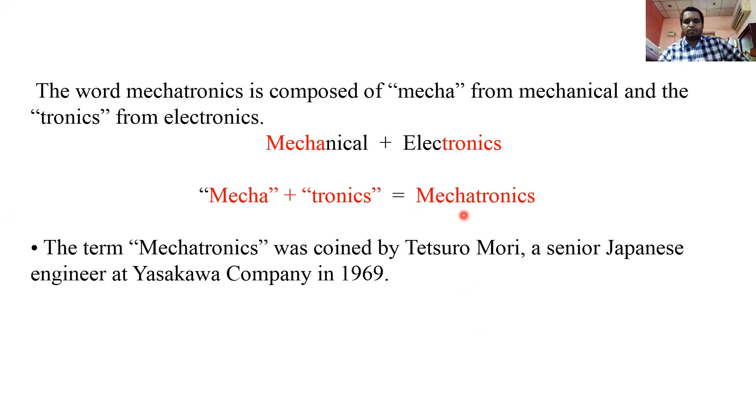The field mechatronics deals with the synergetic integration of mechanical engineering, electronic engineering, computer technology, and control system engineering. Totally, the combination of four things here: mechanical, electronic, computer technology, and control engineering. The synergetic integration of these four disciplines gives the mechatronics.

The main motive of mechatronics is to develop and design computer controlled electromechanical systems. By using mechatronics, we can design and develop computer controlled electromechanical systems. Here, mechatronics is a methodology, and it is a multidisciplinary approach which is used to design computer controlled electromechanical systems.

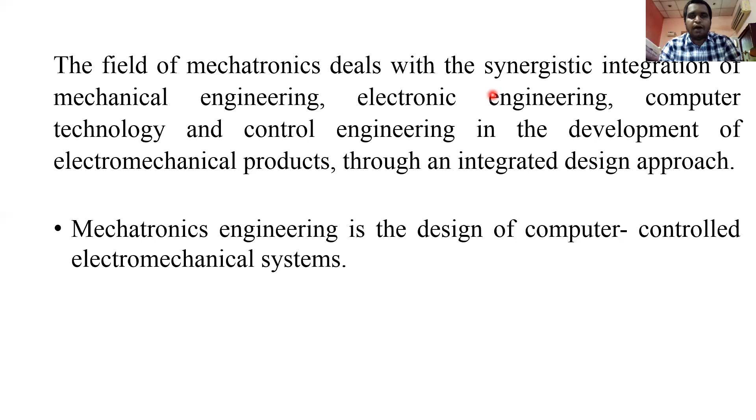The intersection of all those things is nothing but mechatronics. That's why we call it a synergetic integration of computer technology, control systems, electronic systems, and mechanical systems. Okay, mechatronics means not only the combination of mechanical and electronics. It also involves computer technology and control systems.

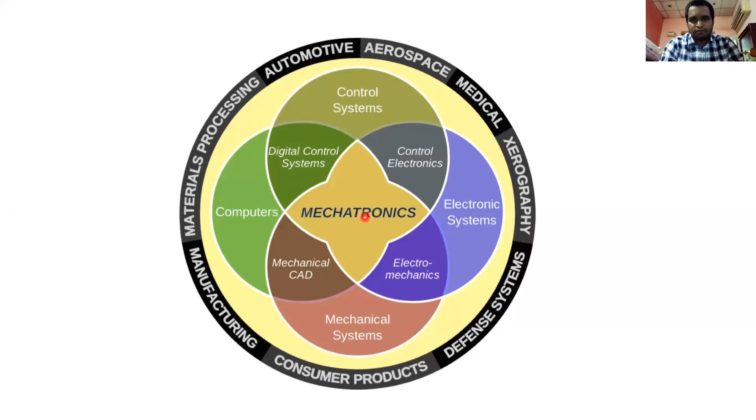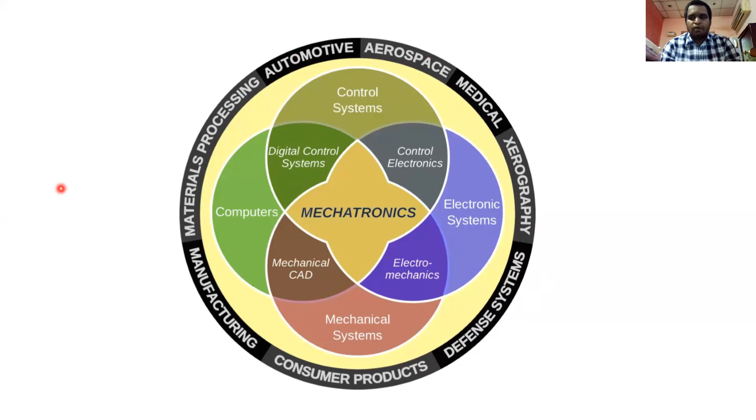Here the part of the diagram represents the applications of the mechatronic system. So we can develop products in the automotive industry, aerospace industry, medical industry, all other industries by using the mechatronics approach. So mechatronics means combination of these things.

Okay, before explaining about mechatronic system, I will give some example. It is the analogy for the computer control system. I will give a real world example. Suppose a person is riding a bike. It is a process. Suppose a dog comes in front of the bike. What will happen? You just apply the brake and stop the vehicle.

Okay, how can you do that? How do you know a dog is in front of your bike? Means you see that dog with the help of your eyes. Here your eye gets the information from the environment. Means the eye is the sensor. The main purpose of the sensor is just to get the data from the environment and process.

Then the information got by the eye is sent to the brain. Here our brain is the control system. Can the brain alone stop the vehicle? Is it possible? No. The brain just analyzes the situation and sends signals to our hands or legs. Then we are applying the brake by hand or leg. Means here legs and hands are actuators.

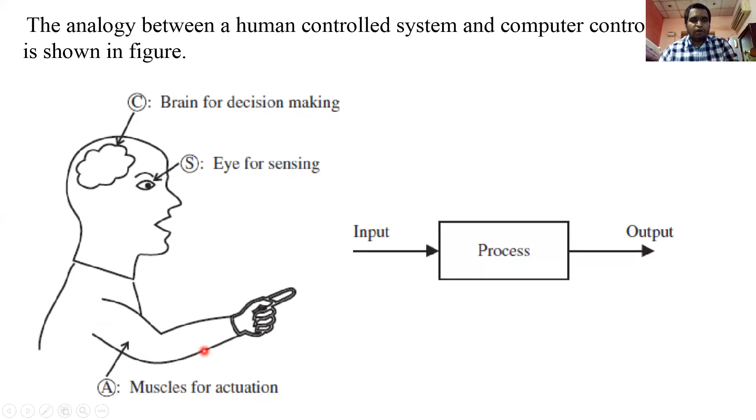So here it is a system. Here three things: sensors, controller and actuation. Now we see the analogy. It is the analogy for a mechatronic system. Now we can compare this to the mechatronic system. This is a computer control system.

Here some process is going. Okay, we get how the process is going. That information we are getting through sensors. Sensors are sending signals to the computer. This is the computer CPU, like our brain, a control system, and it analyzes the situation, analyzes the process. If there are any corrections, it sends signals to the actuation system. Through the actuation system, we can correct the process.

Again, the process is going. If there are any deviations, again you will get data through sensors, analyze, and control the process through actuators. Okay, this is the overview of computer control systems. It is nothing but a mechatronic system. Here this is the brain, this is our hands and legs, and this is the eye or skin, nose, whatever it is, sensors. This is the process.

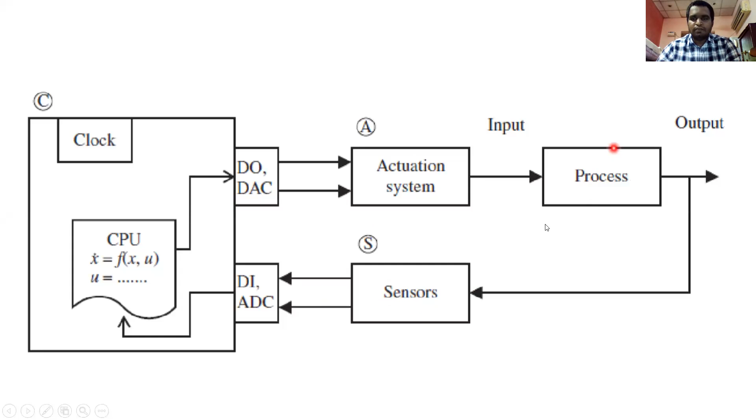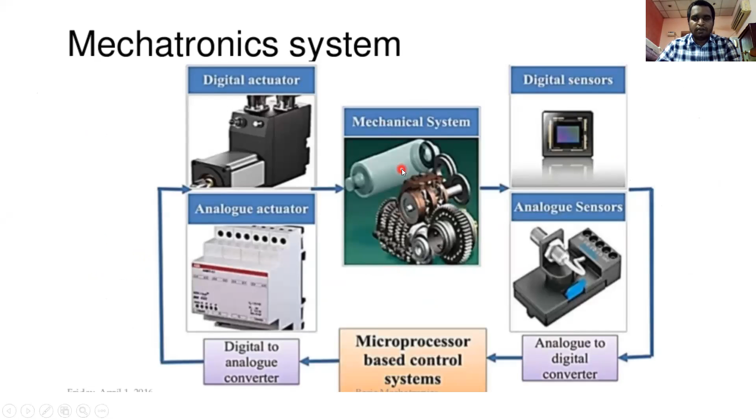Okay, so any mechatronic system consists of three things: sensors, actuators, and a microprocessor-based control system. This is the actual system that we have to control. See this, this is one more example. The motive of this is vehicle speed control. We need to control the speed. Suppose you are riding a car or bike on a highway. If there is heavy traffic, then you have to control the speed.

How to know the speed? By looking at the speedometer, you can recognize the speed of the vehicle. So here, what is the sensor? Your eye. One more sensor, that is the speedometer. Through the speedometer, you can get the speed and send the signals to the brain. Already you know your desired speed in traffic. So according to that, the brain takes the decision, and that is sent to our actuator, meaning you can brake the vehicle and reduce the speed.

Suppose there is no vehicle on the highway, you need to increase the speed. How to increase the speed? Just see the speedometer, send the information to the brain, and press the accelerator. You can increase the speed of the vehicle. So we are controlling a system with the help of sensors, actuators, and a controller. The same is true of a mechatronic system.

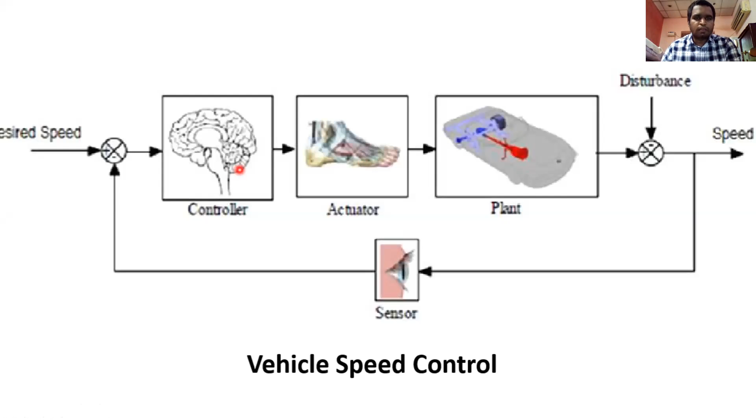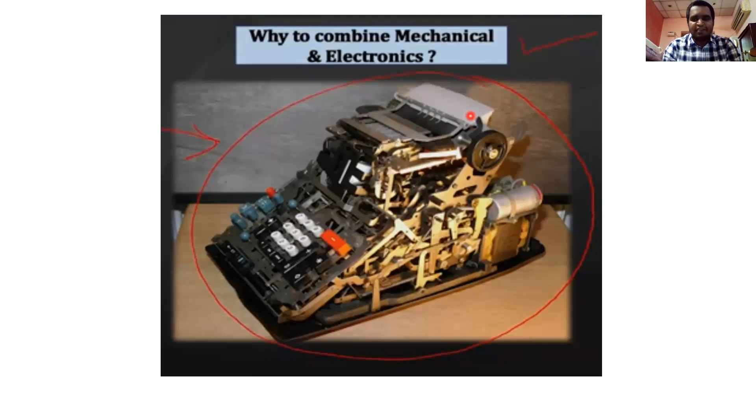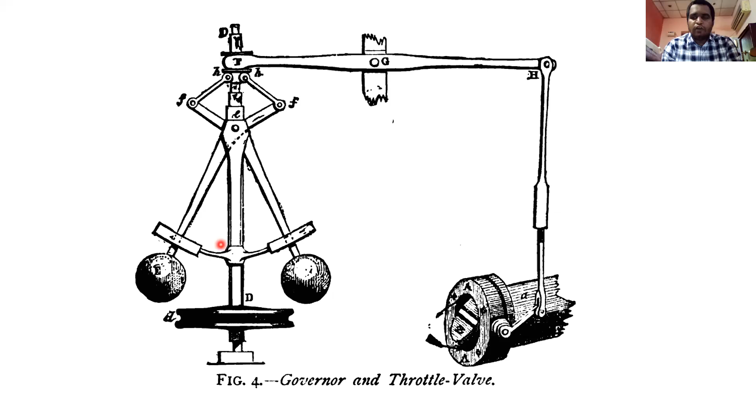Here it is a mechanical type of control system. The main problem with this system is that these are very heavy and there is so much energy loss in operating them. Now there is development of micro-based control systems. We can replace all these conventional control systems with micro-based control systems, which are very smart, accurate and precise. That is the main motto of the mechatronic system: we can replace old types of control systems with new microprocessor-based systems. The development of mechatronic systems originated when micro-based controllers were developed.

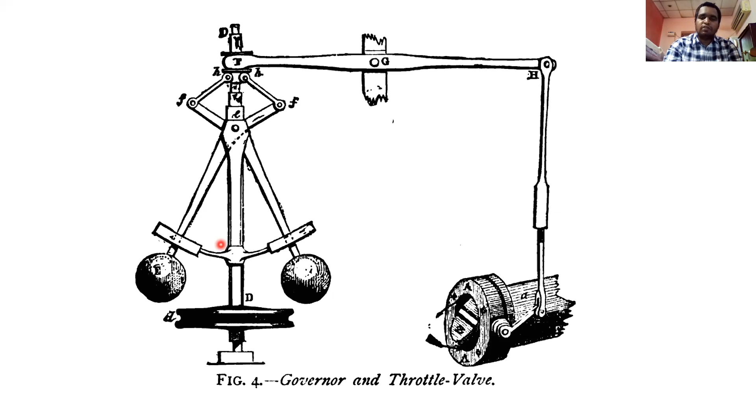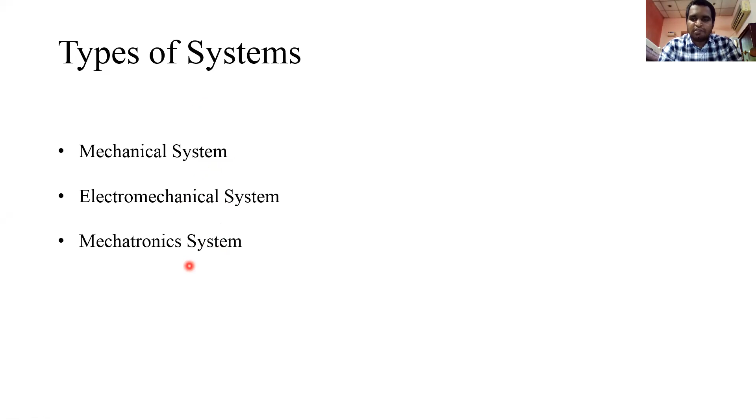Okay, I will give some examples. From olden days, we have three types of systems: mechanical system, electromechanical system, and mechatronic system. Now I explain the difference between the mechanical systems of olden days, electromechanical systems, and mechatronic systems with examples.

See this picture. The first example is the iron box. This is the old type of iron box. It is heated with the help of coal. We just keep burning coal inside the box, and the base of the box is heated. Can you control the temperature of the base of this iron box? Is it possible? Only by pouring some water on the box. This is the old type of control. You can't really control the temperature of the iron box, so controlling it is very difficult. Okay, second, this is an electromechanical type of iron box.

Means this box is working with the help of a heated coil. There is a heating coil inside the box. That heating coil is heated with the help of electricity. Here also we can't control the temperature. You can control the temperature only by switching off and switching on the plug.

If the temperature of the box increases, you just switch off the plug. Next, if you want to increase the temperature, again go to the switch box and switch on the plug. The control of this heating is manual only. You can't control it automatically. Means there is no control system in the electromechanical iron box.

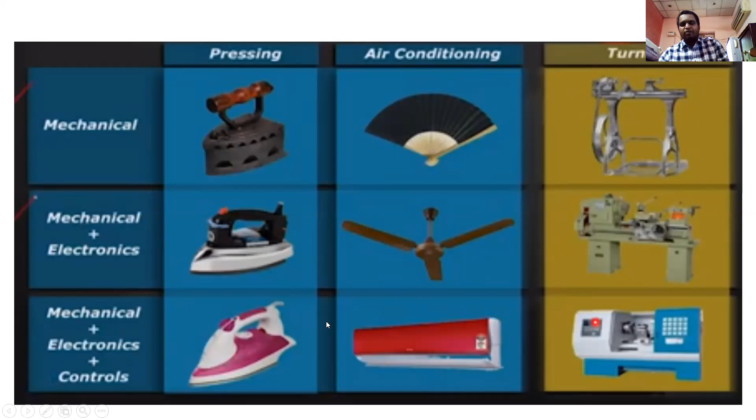The name itself, CNC, means computer numerical control machine. Here the machining, the operations, the setting of tools, the setting of material, everything is done by computer numerical control. So this is the difference between old type of products, mechanical products, electromechanical products, and mechatronics products. This is why mechatronics is needed.

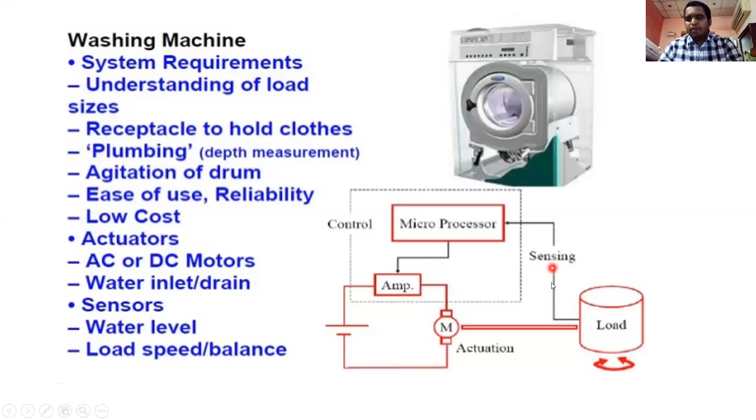If the load is more, it sends signals to the motor and the speed of the motor increases. If the load is less, the speed of the motor is adjusted according to the load through the microprocessor. Who is the controller here? The microprocessor itself controls the speed according to the load. There is no need of human interference. This is the main advantage of the mechatronic system. Here the microprocessor is the controller, the motor is the actuator, and we have some sensing elements inside. These are two examples of mechatronics. Some more examples I will give later. Come to unit 1.

Before going to unit 1, I will unmute you. If you have any doubts regarding mechatronic systems, please ask. You can unmute yourself. Then I will start unit 1.

Sir, actuator? Here, the actuator is a motor. It produces mechanical energy according to an electrical signal. Suppose a motor, or our hand, is the actuator. It can apply mechanical force according to the signal of the brain.